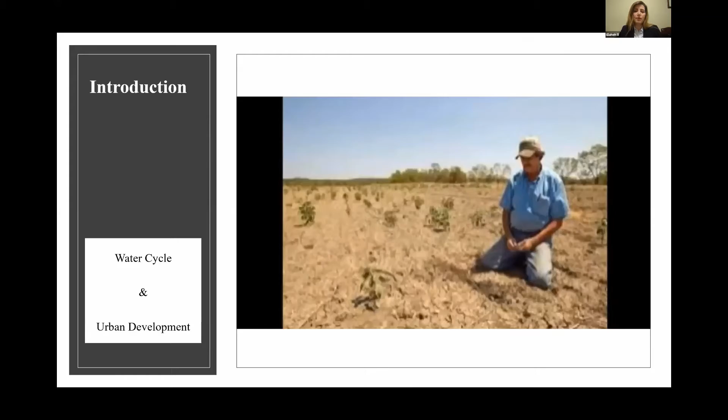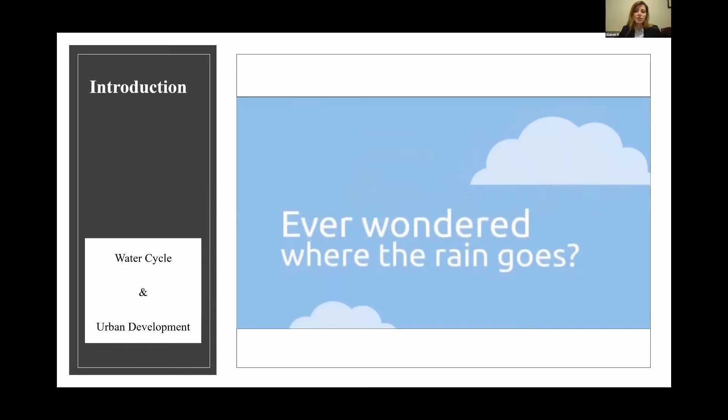Rainwater from heaven. Sometimes we get too much, sometimes we don't get enough. We must have water to survive, to grow our food, to enjoy our homes, to run our industry, to improve our quality of life. In the water cycle, under natural conditions, rain or snow that precipitates onto the land evaporates into the air, infiltrates into the ground, or is soaked up by vegetation.

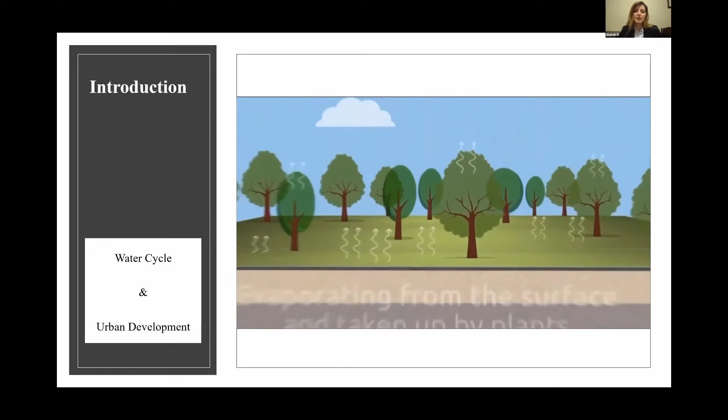The remainder of rainwater becomes runoff into the watershed and drains to the lowest point in the landscape, such as a river, local stream, lake, bayou, wetland, or stores as fresh water in lakes.

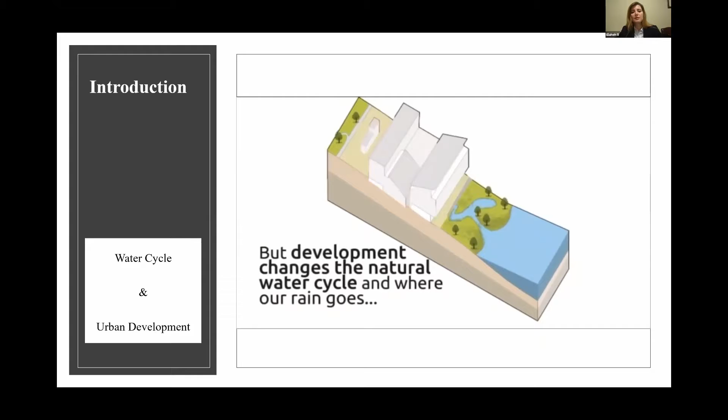Rapid urbanization has altered many natural water cycles, which have presented several challenges to local decision makers and created negative effects upon the local environment.

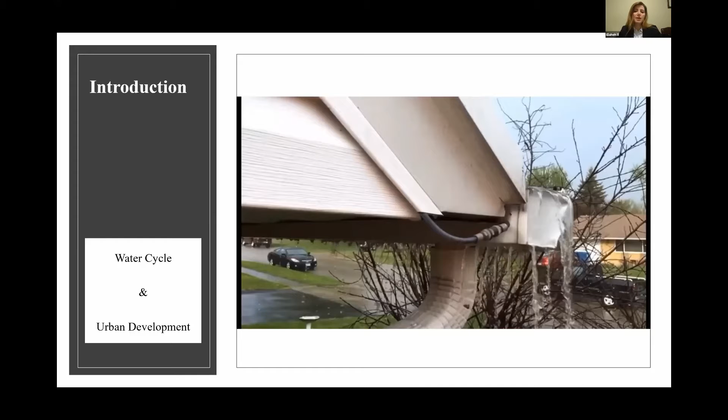Take a look out of your window when it's raining, even when it's not raining hard and it doesn't seem that significant. Some of the rain soaks into the ground, some gets taken up by plants, some collects in puddles, and some runs off downhill, usually into the street. One of the biggest challenges in the city is the proportions of all these different paths the water can take.

All these streets, sidewalks, buildings, and parking lots cover the ground with impervious surfaces, which means that instead of water infiltrating, it runs off toward creeks and rivers, swelling them faster and higher and filling them with more pollution.

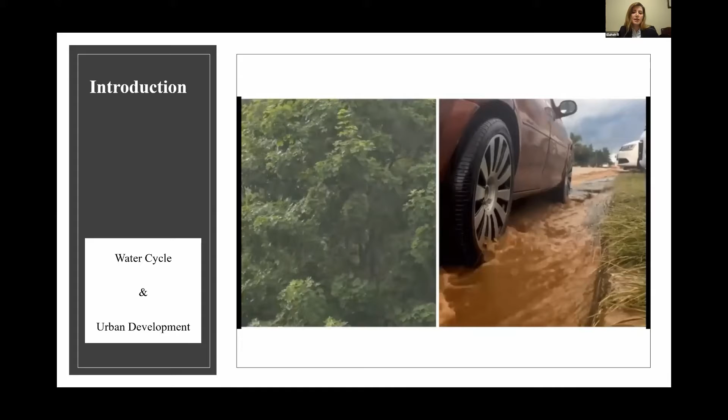Instead of acting like a sponge to absorb rainwater as it falls, urban watersheds act like funnels, gathering and concentrating rainwater runoff. Therefore, one of the biggest impacts on the environment of building anything is its effect on how water moves above and below the ground during storms.

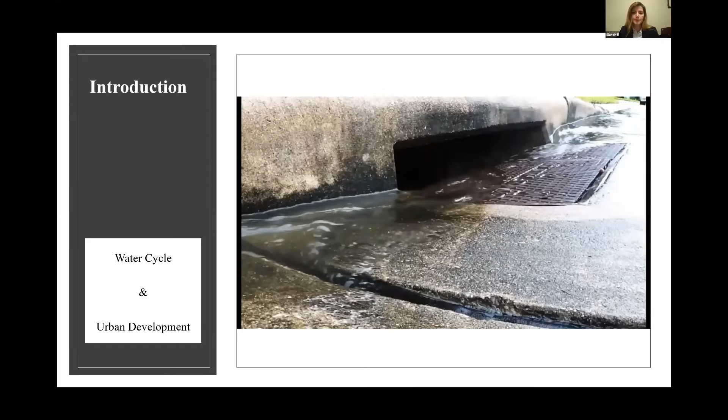Here is some of the infrastructure that cities use to manage this massive challenge, and a few ideas in stormwater management that are slowly taking hold in urban areas.

Increased runoff has been a problem since people started living in cities in the first place. The first way we handled it was simply to get the water out and away as quickly as possible. That's because runoff creates flooding, and flooding causes billions of dollars of property damage and many lives each year. This solution is in the name that we still use for how cities manage storms: drainage.

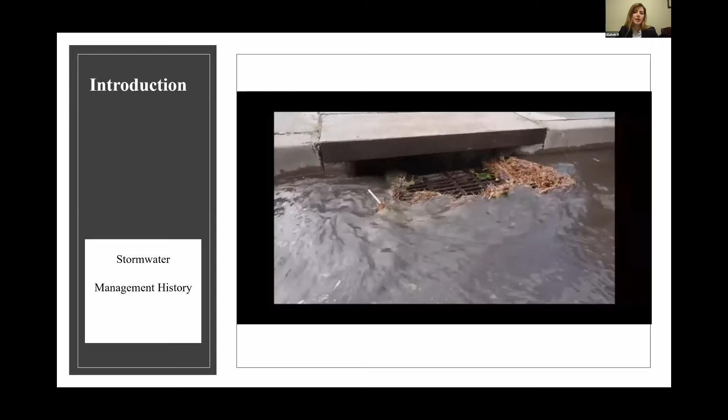Most cities are organized so that the streets serve as the first path of flow for rainfall. Individual lots are graded with a slope toward the street, so that water flows away from buildings. The standard city street has a crown in the center with gutters on either side for water to flow. This keeps the road mainly dry and safe for vehicle travel while providing a channel to convey runoff.

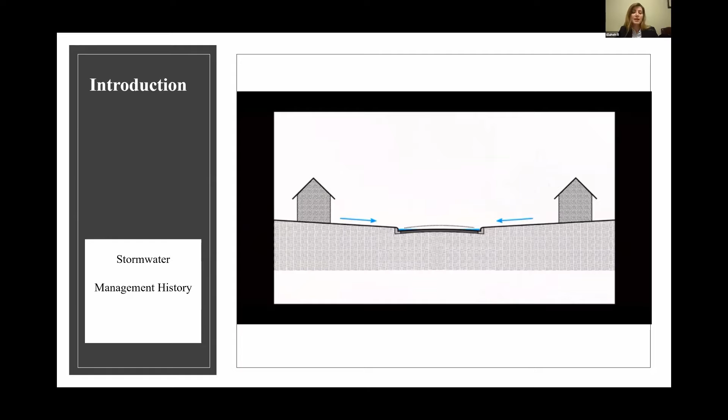But the streets are not the end of the line. Eventually, the road will reach a natural low point and start back uphill, or will have collected too much runoff that it can't hold it all in the gutter. At this point, the water needs a dedicated system to carry it away.

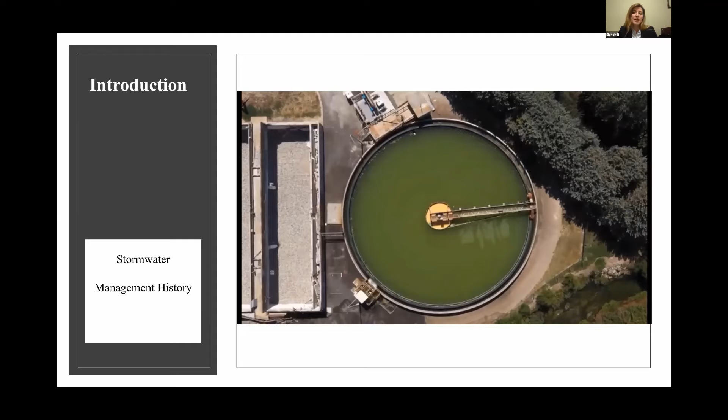In the past, it was common to simply put all the runoff from the streets directly into the sewage system. And actually, there is a really good reason not to do that. At the end of each sanitary sewer system is a wastewater treatment plant that was almost certainly not designed to process a massive influx of combined sewage and stormwater runoff.

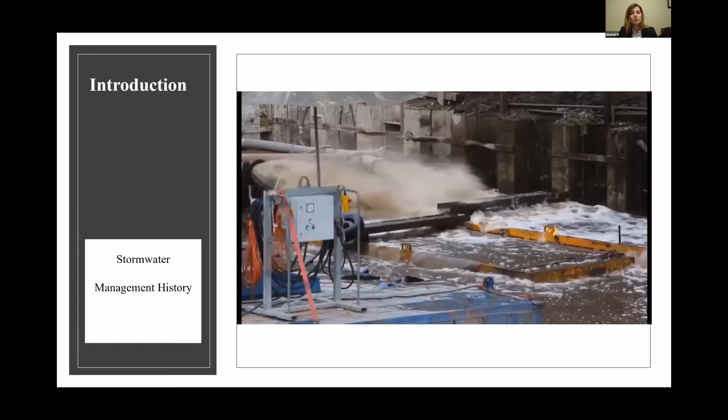That's why most cities now use a municipal separate storm sewer system, usually abbreviated as MS4. These are networks of ditches, curbs, gutters, sewer pipes, and outfalls dedicated only to moving runoff from everywhere in the city to the natural waterway.

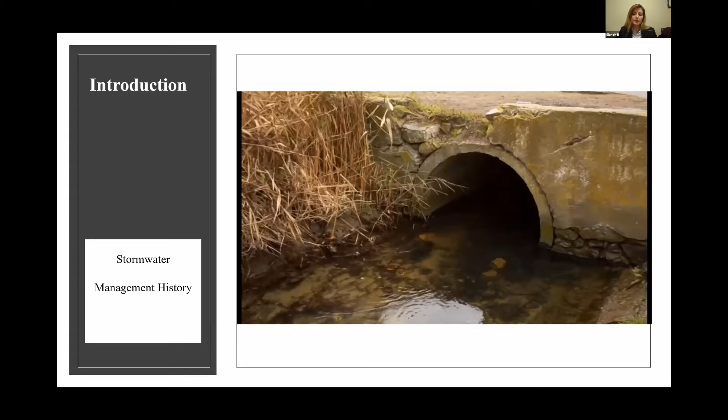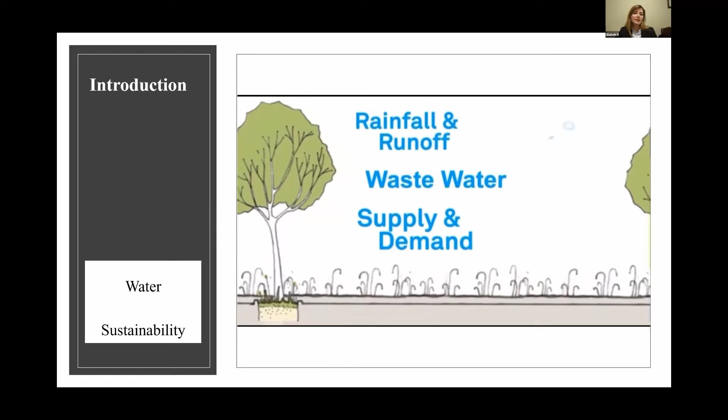Stormwater management, through effective management of water resources, integrates the water cycle with the built environment through good planning and brings all of the elements of the water cycle together: supply and demand, wastewater, rainfall and its runoff, as well as its contribution to local character, environment, and community.

With this approach, we improve quality of life while addressing runoff pollution and water scarcity issues, changing water from a potential nuisance into a valuable resource.

In this way, with the pressing urban water demand, large funding needs, and potential of rising runoff, water conservation is a prevention method of stormwater management. Thus, collecting rainwater through installation of an RWH system is a significant and effective solution to reduce water demand, cost, and maintenance on public water infrastructures.

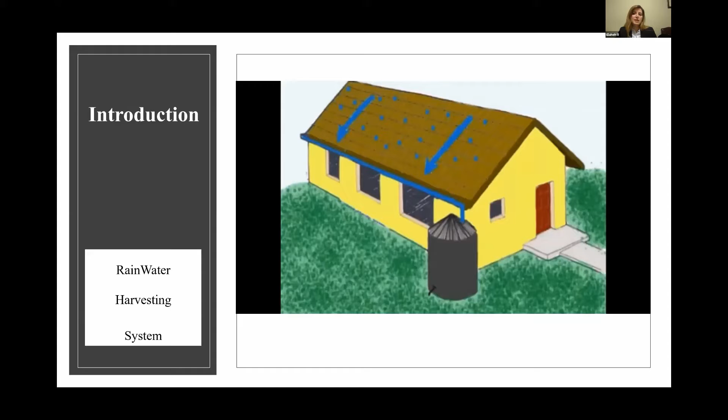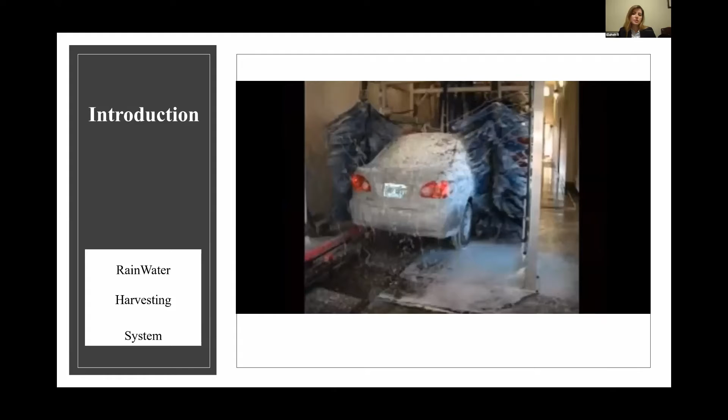Rainwater harvesting is collecting rainwater and storing it for future use. It can be used for non-potable water such as landscaping, greenhouses, fire suppression, gardening, fountains, pools, livestock, and industry. RWH can be applied at every scale, from our homes to large cities and towns.

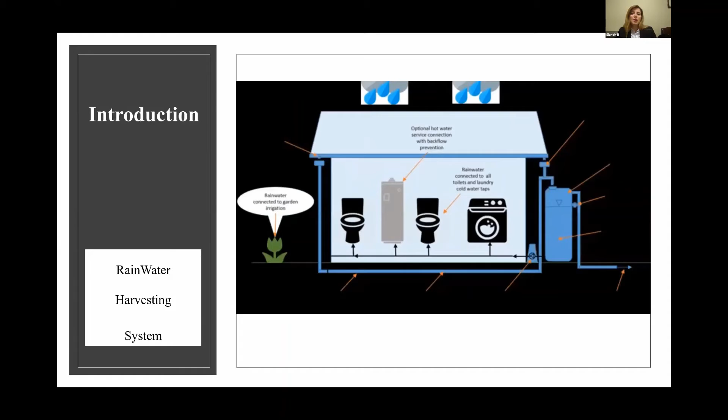But how does it work? On a simple level, instead of letting rainwater from the roof run away down the stormwater drainage system, we could use it to water gardens, flush toilets, and do laundry. In this way, we would relieve pressure on our water supply and reduce runoff from paved surfaces to minimize damage to valuable infrastructure and homes.

A common question is how much rainwater we can collect if we are collecting rain off our roof. A 1-inch rain on a 1,000 square foot roof will yield 624 gallons of water.

In this study, Harris County, Texas is selected to assess the stormwater runoff reduction volume through retaining rainwater in an RWH tank. Harris County is the third most populated county in the nation and is the most populous county in Texas. Our region is low-lying with flat topography, predominantly clay soil, and high average annual rainfall that contributes to frequent flooding. Harris County had the most total water use in Texas in 2018, and many of its underground water sources are being depleted.

The Texas RWH Evaluation Committee was established in 2005 to evaluate the potential of RWH and recommend minimum water quality guidelines and standards. It recommends the use of harvested rainwater for landscape watering and indoor non-potable uses such as washing machines and toilets. Furthermore, in Texas, tax exemption on purchasing RWH equipment and supplies is an incentive for installing the RWH system.

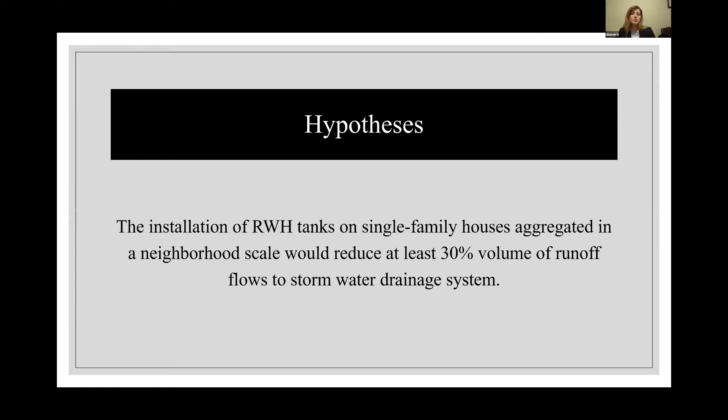Along with all RWH's potential benefits as a LID technique, the hypothesis of this research is that the installation of RWH tanks on single-family houses in a neighborhood would reduce at least 30% of the volume of runoff flows to the stormwater drainage system. To deal with these challenges and help achieve the goal of the stormwater management program, many studies have considered RWH as a LID to manage natural resources and contribute to sustainable urban development.

Based on studies, stormwater management is the effort to reduce runoff of rainwater into streets and other sites to improve water quality. LID systems use natural processes for stormwater to protect water quality. RWH is a retention technique to capture and manage stormwater at the source for water usage.

For water sustainability, in its three issues about demand, RWH can reduce 38 to 65% of water demand for toilet flushing and larger than 20% for irrigation. About economy, RWH can reduce utility bills and the impact on stormwater infrastructure. About environmental issues, RWH can reduce the amount of polluted runoff, helping to bring flow and water quality back toward pre-developed levels.

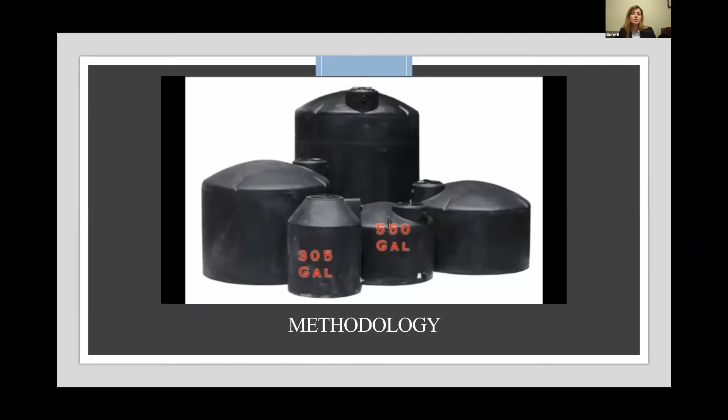How do we start? What are our requirements? How will the water be used? What products do we need? The first question is always, what size tank do we need? Of course, the answer depends on what we will use the water for and in which study area.

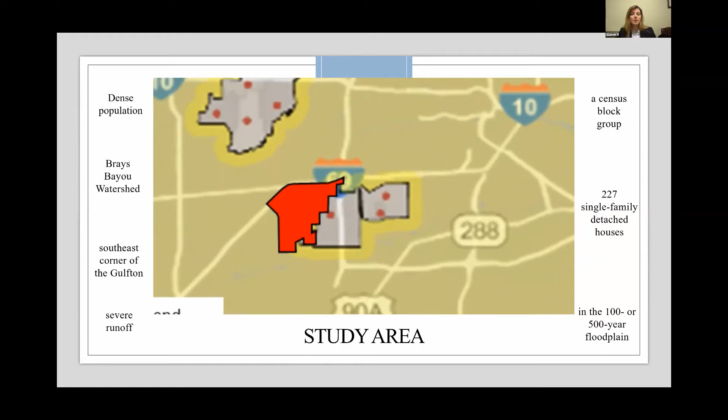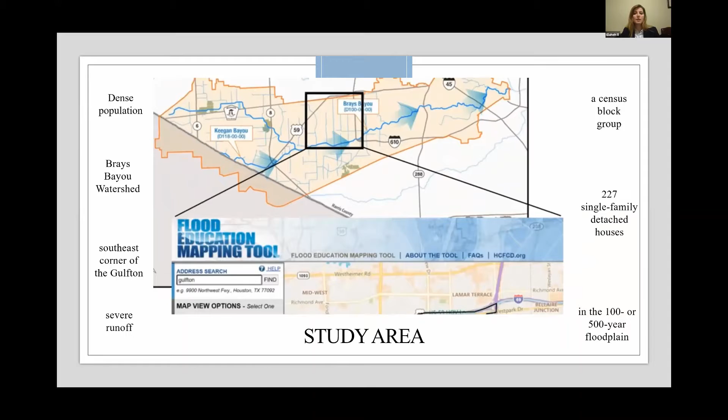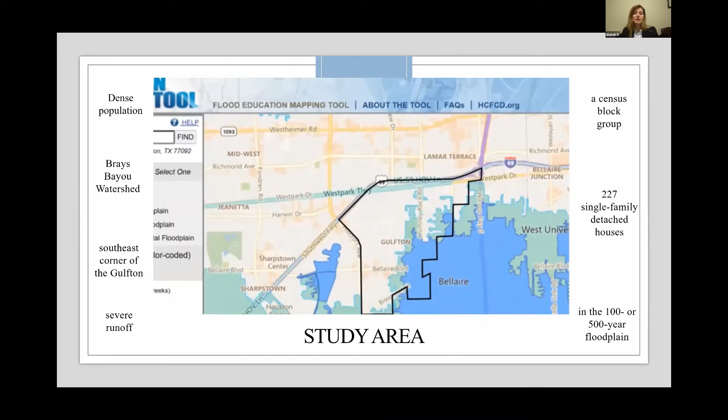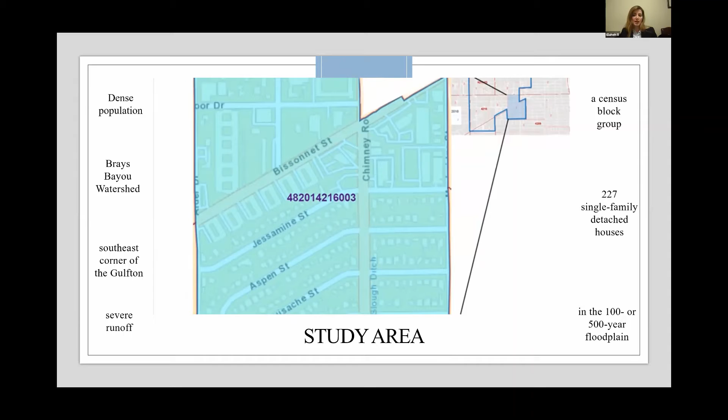Gulfton, which is the most densely populated neighborhood in the city of Houston, is selected because it would be more efficient. Gulfton is in the Brays Bayou watershed, and the closest Harris County runoff gauge is located at Brays Bayou and Rice Avenue. The southeast corner of Gulfton is the most at risk for severe runoff. In this study, the census block group, which includes 227 single-family detached houses located in the 100 or 500-year floodplain, is chosen to make it more manageable in scale and useful for future research.

Precipitation is calculated using daily rainfall data recorded at the gauge located near the southeast of Gulfton. The time frame used in this study is a 10-year period, 2010 to 2019, to make results more understandable and better comparable.

For tank size, the basic rule for sizing any RWH system is that the volume of water that can be captured or stored must equal or exceed the volume of water demand. Total indoor water usage for a household with 3 people in a single-family house for toilet flushing and laundry equals 52.2 gallons a day. Outdoor water usage is about 80 gallons a day per house. Therefore, a tank with a capacity of 4,000 gallons would be adequate to capture the rainwater, while assuming an empty tank at the first of each month.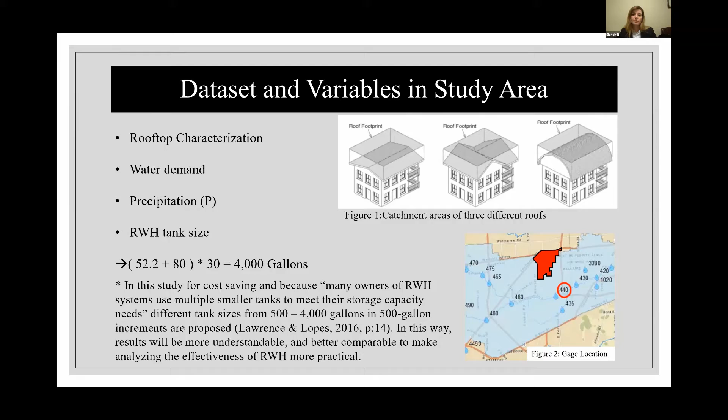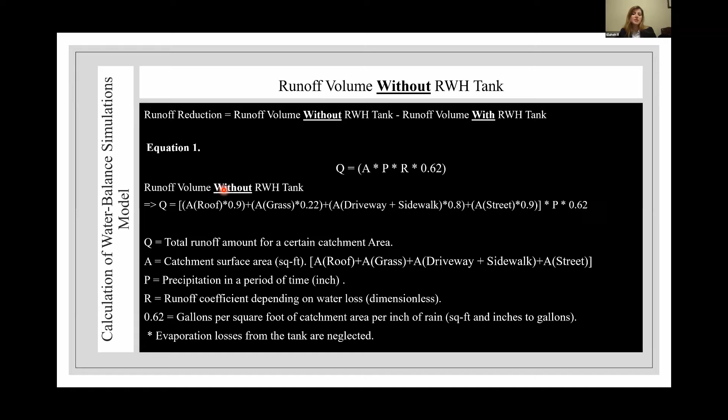Daily water balance simulation for a certain study area is executed without an RWH tank, then recalculated with an RWH tank for comparison. These calculations are performed at a daily rate for 10 years of precipitation recorded from 2010 to 2019. Total daily runoff amount without considering the RWH tank is calculated based on equation 1. Daily Q is calculated by summing the multiplication of daily rainfall amount by the size of different catchment areas and their specific runoff coefficients.

For calculating the amount of runoff considering the RWH tank, we need to determine the amount of rainwater that can be stored in the tank after the end of each day. Equation 2 is used for this, which remains between 0 and tank size. It depends on total daily inflow to the rainwater harvesting tank from the roof, water demand, and tank size. Daily inflow to the RWH tank from the roof is determined based on equation 1 for the roof, to determine the total daily amount of rainwater that can be collected from the rooftop.

Estimating daily runoff reduction volume considering the RWH tank requires calculating the daily amount of rainfall retention, which is the difference between the amount of rainwater that can be stored in the tank after the end of each day and the rainwater stored in the tank the day before. To estimate the percentage of yearly runoff reduction based on equation 3, daily amounts of rainwater retention are added for each year and divided by the sum of daily runoff amounts for the same days, times 100. A total of 160 simulations are performed and charts are produced in the results section.

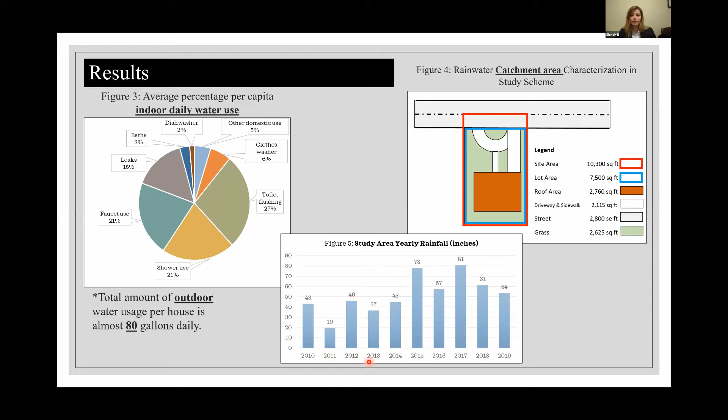The annual reliability of the system to provide sufficient water to satisfy demand, as a percentage, is calculated. To evaluate this reliability, 160 simulations are performed by dividing the sum of the amount of rainwater that can be used for consumption each day by the total yearly amount of rainwater demand, times 100.

The results show that maximum achievable reliability is not observed for all considered scenarios. The reliability ranges between 43% and 73% for indoor water demand, and between 24% and 65% for indoor and outdoor water demand.

As the charts show, the most reliable tank size is the 3,000 gallon tank, shown in light blue. On average, a 1,500 gallon tank, shown in yellow, provides an amount of rainwater similar to other tanks with more capacity, except for the 3,000 gallon tank, for both water demand scenarios. Overall, reliability of the system increases with more yearly rainfall.

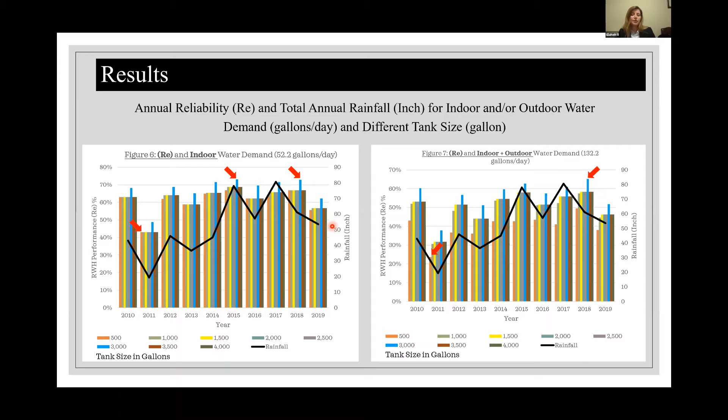The top figure shows the total amount of yearly runoff without considering the RWH tank, in gallons, which is calculated from equation 1 and depends directly on the amount of yearly rainfall in inches. The two other figures are from the differences between equations 1 and 2.

These figures are samples showing runoff volume with and without the RWH tank in a dry year and a wet year. The maximum runoff reduction corresponds to the tank with the highest volume, which is 4,000 gallons. It's about 6.3 million gallons in the dry year and 13.7 million gallons in the wet year.

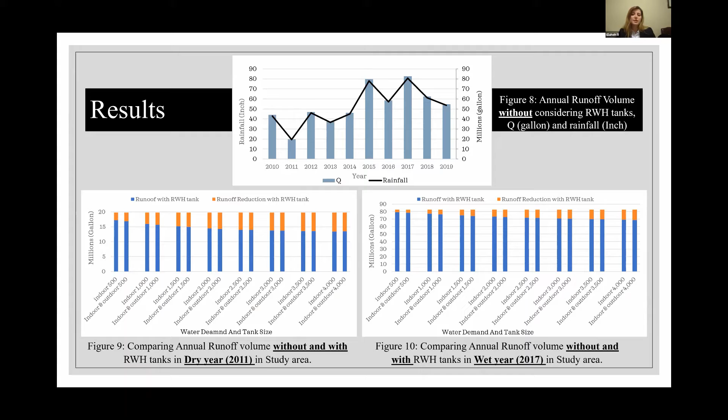Let's look at the table I prepared for these runoff reduction charts. As you see, for each tank size, the amount of runoff reduction increases with increasing water demand, but this increase is not significant in the dry year. And when the tank size is more than 3,000 gallons, the increasing trend in runoff reduction reverses to decreasing.

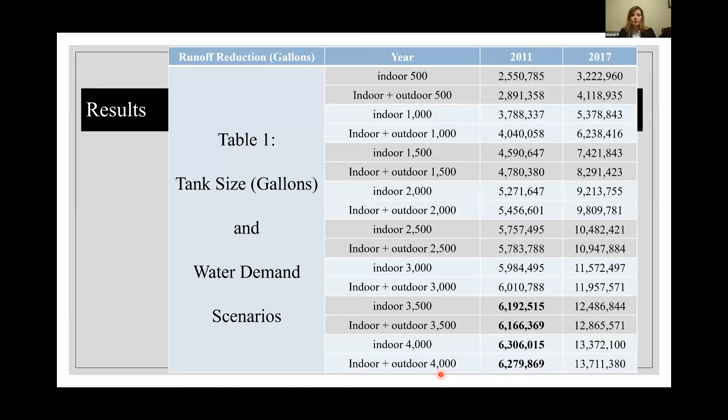Results of equation 3 show that for two different water demand scenarios, the percentage of runoff reduction ranges between 4% in wet year and 32% in dry year, depending on tank size. There is not a significant change of PRR for the same tank size with different water demand, which is between 0 to 3% increasing in PRR with more water demand.

Overall, although PRR increases with increasing tank size, in both water demand scenarios PRR does not change significantly when tank size is more than 3,000 gallons.

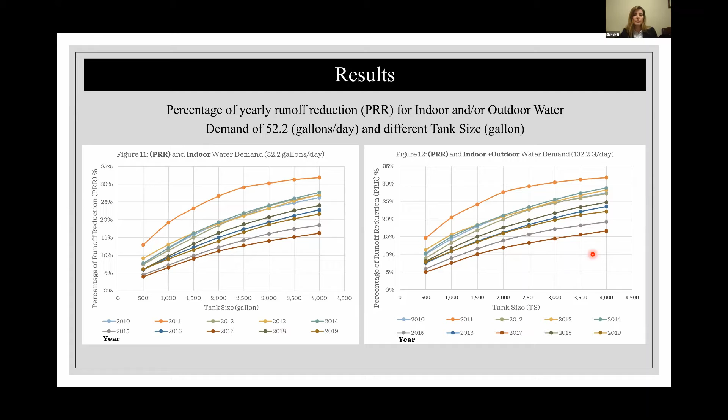Also, installation of a 3,000 gallon RWH tank in this study area with study assumptions has a critical potential to reduce runoff up to 30%, considering either of the two water demand scenarios.

Based on results of this study of 227 single-family houses in Gulfton, considering a 3,000 gallon tank, an average of 9 million gallons of stormwater is diverted yearly. This means that each house reduces about 40,000 gallons of stormwater runoff annually.

Based on this study, installation of two 1,500 gallon tanks instead of one 3,000 gallon tank is recommended, to have more chance of fitting in a lot area, and it has the advantage of emptying one tank for maintenance while the other tank still has stored water.

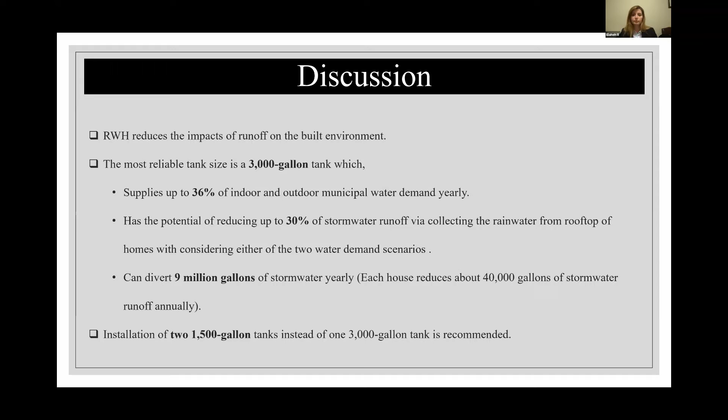Results of this study support the results achieved by many other studies about reducing demand for water from the municipality, which can be by 14 to 36%.

There are more than 380,000 single-family homes in Houston. If assumed that half of these homes use the municipal water supply, 7.6 billion gallons of rainwater yearly could be diverted from the stormwater system.

This study's results support other studies that concluded heavy rainfall requires a RWH tank with higher capacity, and show that in this study a 4,000 gallon tank has the most potential for reducing runoff volume annually.

But overall, in this study the 3,000 gallon tank would be the ideal size to reduce almost the same amount of runoff as the bigger tanks.

Also, results support other studies about economic issues, showing that the RWH system would be economically viable by saving money on water utility bills, and considering sewer and stormwater runoff reduction at the city scale would be economically efficient.

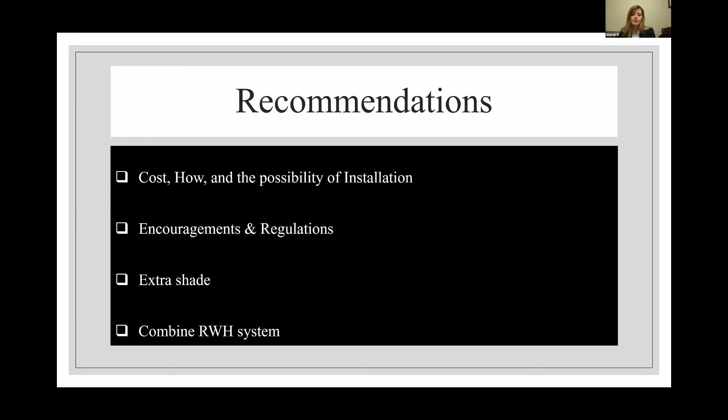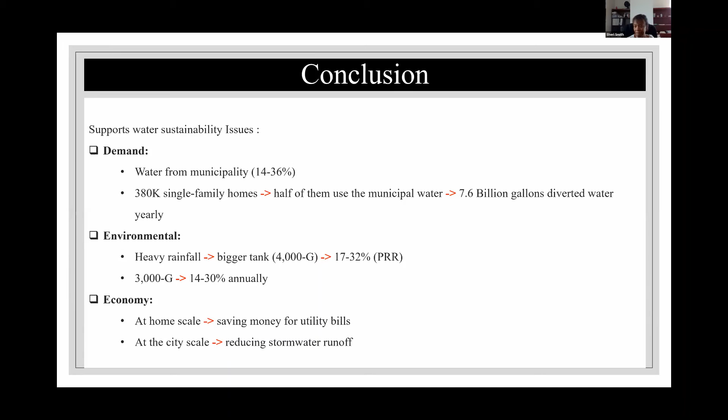Thank you, Elahe. That was really good. So I would like to initially open up the questions to the committee, if you have any questions for Elahe. And you may need to go back on some slides depending on the nature of the questions. Okay. So Dr. Chun, Ms. Escobar, Dr. Hwang. All right, so I'm gonna go first.

So the presentation is so much better than your manuscript, very easy to understand and very organized. So I love it. So I'd like to echo your research output. So basically, after installation of the water tank, we may need to think about the economic impact. The reason why we do this kind of research activity is for the economic impacts of damage by hurricanes or other natural disasters, right? So if there is no benefit on the economic aspect, we don't need to do that.

So anyway, have you ever thought about how much positive impact this kind of system brings to the economic system? For instance, recovery or maintenance, insurance, or human behavior, everything is going to be very impacted by the water tank. So I'd just like to know your idea about that.

I have searched about the economic issue, and as I mentioned in the literature review, they mentioned that it's mostly for sewer and stormwater systems. I've calculated the water utility. When you see that, you feel it's not significant, because every 1,000 gallons of water costs you only $6. But after that, when you add issues about water supply infrastructure, the cost of runoff, losing lives or property damage, and what cost we have for improving our stormwater drainage system.

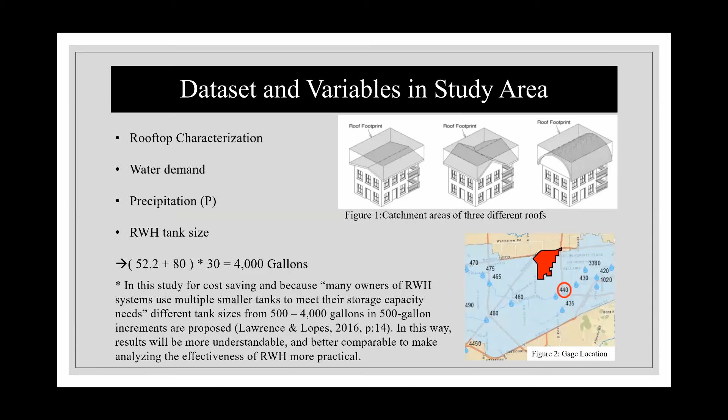Title? Okay. Yeah, title. Okay, so you said the runoff volume reduction. So you're focusing on the area-wide runoff volume reduction, or just a runoff volume reduction for like individual houses? Where do you focus?

I mostly focused on a neighborhood area, a block-scale neighborhood, which has 227 single family detached houses. And as you know, water usage restricts me because the information for water usage was for single family houses. So I've chosen those 227 single family houses. And then I've calculated all formulas for those in Excel and the charts for all those 227

single family homes. Okay, then in terms of flooding issues, how much can those rainwater harvesting systems reduce flood volume? In that neighborhood, with the assumptions I have mentioned, I've found that it can reduce up to 32% with a 4,000 gallon tank and 30% with a 3,000 gallon tank.